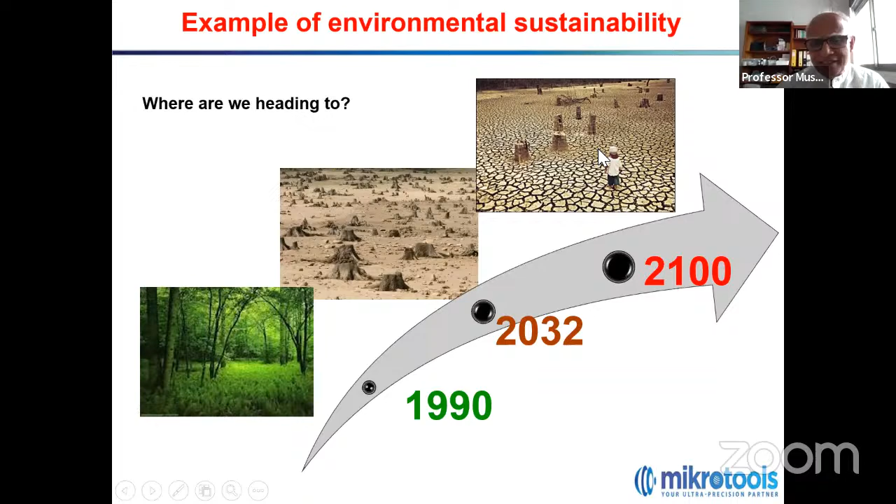We cannot afford to do that. We'll have to think sustainably. We need to remain sustainable. And so we'll have to continue with sustainable development. For that, we'll have to make a trend that what meets the needs of present today, it should, without any compromise, meet the needs of future as well, so that the whole universe remains green, evergreen, what it was, and it will be in the future as well.

Now, who will do it? As Einstein says, engineers create that which has never been, and others also said so. So it is our responsibility, the mechanical engineers, manufacturing engineers, to create things, innovate things, and make things much cheaper and easier, of course, higher and better quality.

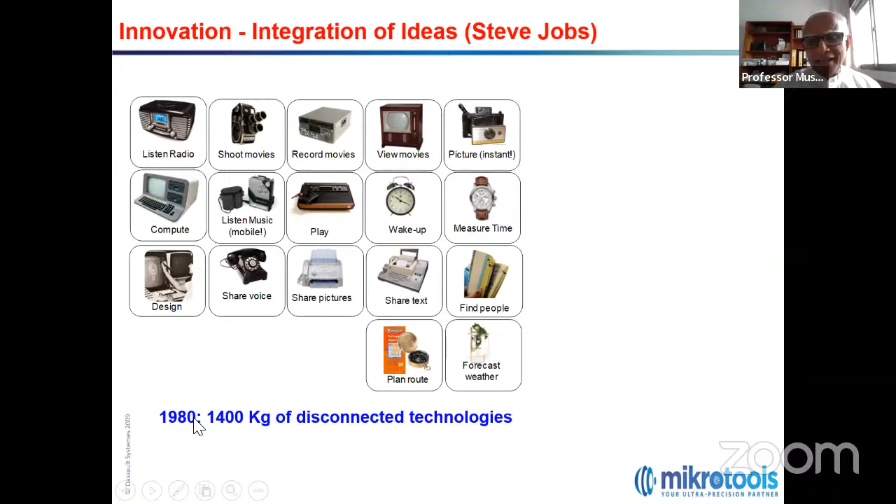Now, nothing to worry, actually, the trend has already started, as you see, knowingly or unknowingly. Steve Jobs did it in 2007. I hope you can guess who did it. All these gadgets, television, camera, whatnot, all communication and all utility devices, which was weighing 1,400 kg in 1980, just came to a smartphone, which is only 200 grams, done by Steve Jobs. So this is in his, he did it.

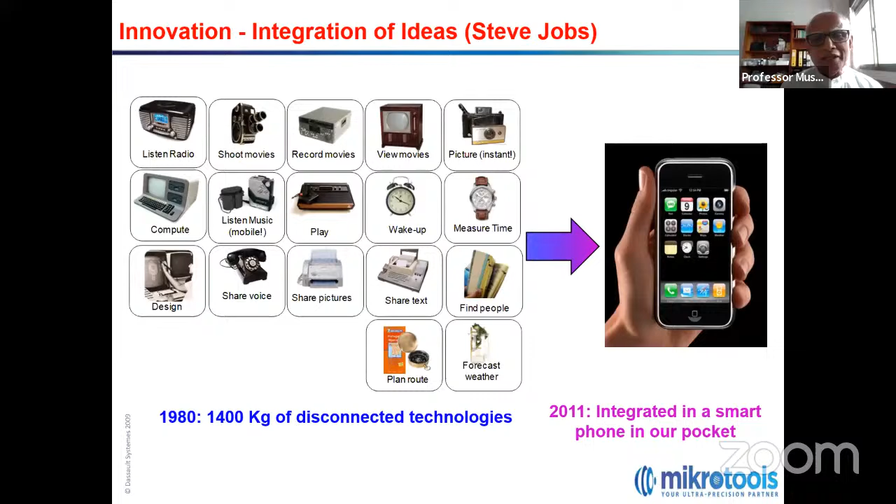And I'm happy to announce and show you that we also started the same trend, and we started in 1990s. We thought we'll make small products. We'll do micro machining to make micro products rather than using big machines. And we found that to make micro product, all these machines individually cannot do it. We'll have to have a machine which is much smaller and can do everything, which initially it was not accepted by people. And even the company where I was working, they said, no, ridiculous idea.

That I left the company in Japan and joined NUS in Singapore. And my first research proposal was to integrate all these machines into one machine for micro machining. And that time, roughly, all these machines were about 8 tons. Now we made a machine in 2003 and patented it, which weighs up to 1 ton. So a good thing is that it started.

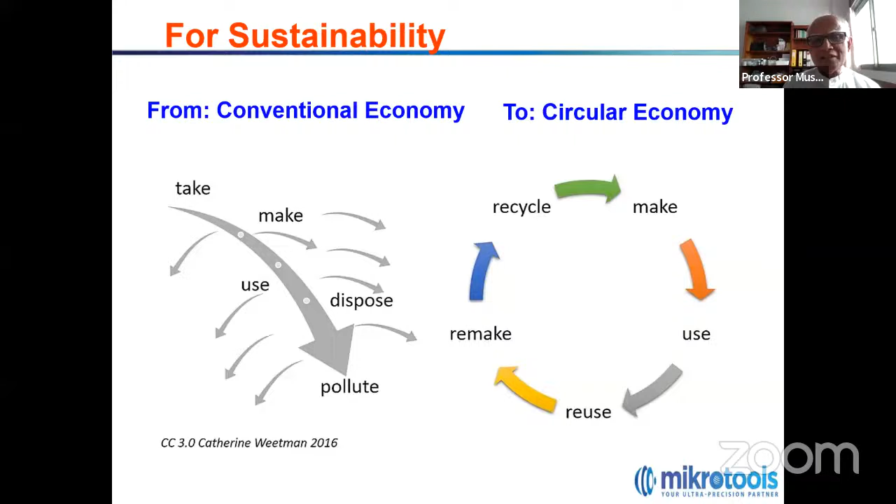And at the same time, if we look at for sustainability, what we need to do, we need to move from conventional economy to circular economy. That is the trend now. It started already. So what we do, we make a thing, we use it, dispose it, pollute, throw it and pollute it. But on the contrary, we will have to do something, make things, use them, reuse them, remake them and recycle them. Then all this energy saving will be upward. I want to move left, minimize the use. So that's why we'll have to be not only circular, spiral economy moving upward.

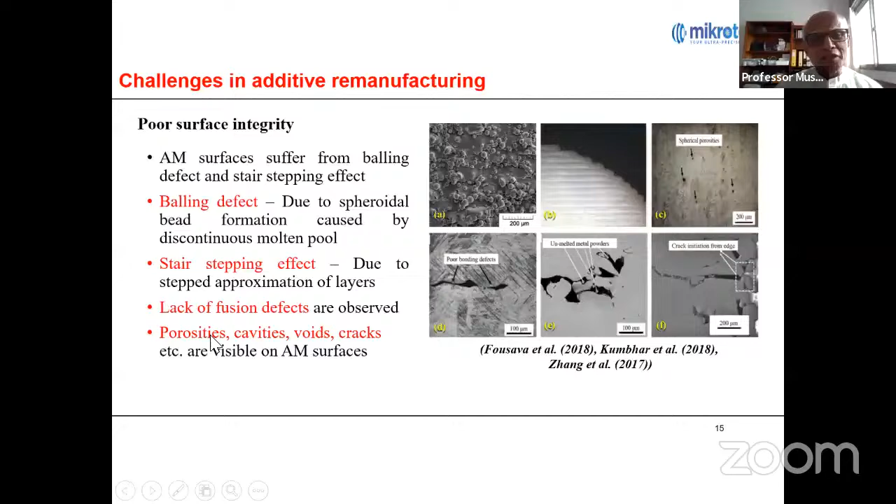And for that, they need to improve the surface finish, basically either do grinding or polishing. So the grinding is a very conventional way, and later the polishing is done by laser, then abrasive flow finishing, chemical polishing, and all these things are going on. So these processes are there, laser polishing, chemical polishing, abrasive flow machining, and machining polishing. I'm not going to go into those. It is there in the presentation. Now, what is the problem of this conventional machining things, conventional polishing things? Let me see, grinding and polishing to improve the surface finish.

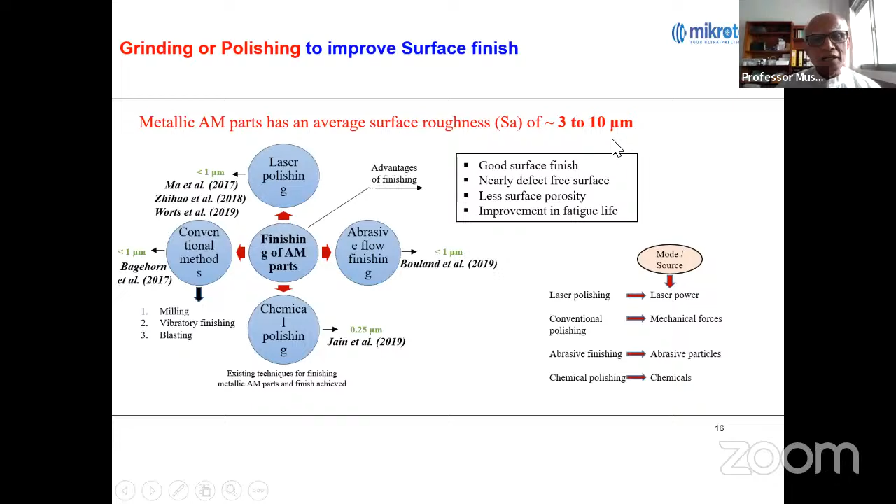One slide I missed. Usually after 3D printing, you get a surface finish of 3 to 10 microns, and by different processes they can reach up to 1 micron. But surface finish is somehow acceptable.

But the main problem is when you do grinding, there are cracks of different dimensions. It could be a macro crack, it could be a nano crack, but there are cracks. As long as there is a crack, the surface is not perfect, even if it's considered a high precision, ultra precision part.

So it cannot be used for high quality products, especially optics. Then comes polishing. The main problem of polishing is it's a non-deterministic process. If the surface profile is not correct, the reflectivity of the surface is not there. So for ultra precision parts and components, even polishing and grinding cannot be accepted. We will have to go for machining.

So then comes ultra precision machining. Now coming to advanced machining techniques in remanufacturing, let me talk about two areas: one is micro machining, another is nano machining. Let me start with micro machining.

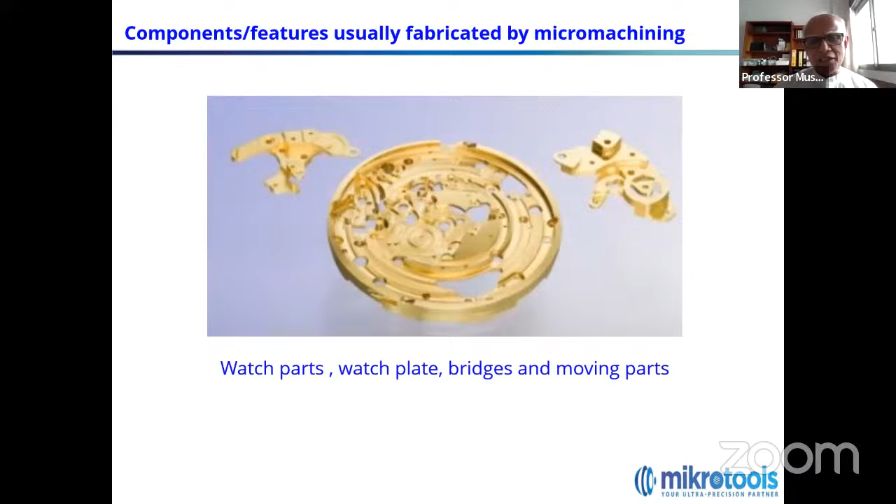Why is it so important? If we look at any fine components like watch parts, watch plate, bridges, and moving parts, all these parts are very high quality, very fine, with very small features. A few more examples like gas and liquid thermometry - very fine features, fine machining, quality of surface approaching nano.

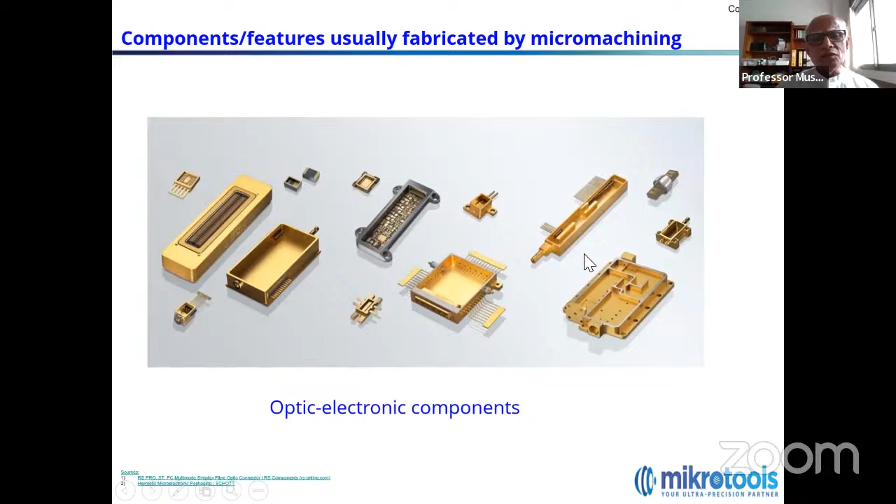And these are nano positioners, and these are all components of optic-electronic components. You see, so minor, but they must be very accurate. And we cannot allow them to be discarded - as Professor Dixit was saying the first day, if one component of the watch is damaged, we should not throw it away, we should repair it, redo it, and remanufacture it.

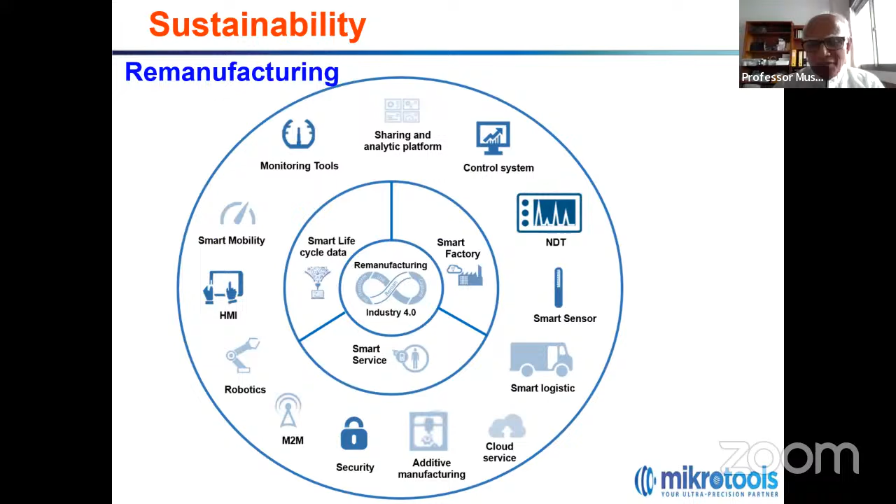Now, talking about micro machining, how are you going to apply it in remanufacturing? Taking this picture, we'll have to manufacture, which is basically composed of so many micro components or components with micro features. Additive manufacturing should be there, as I mentioned, but we developed a machine especially for micro machining.

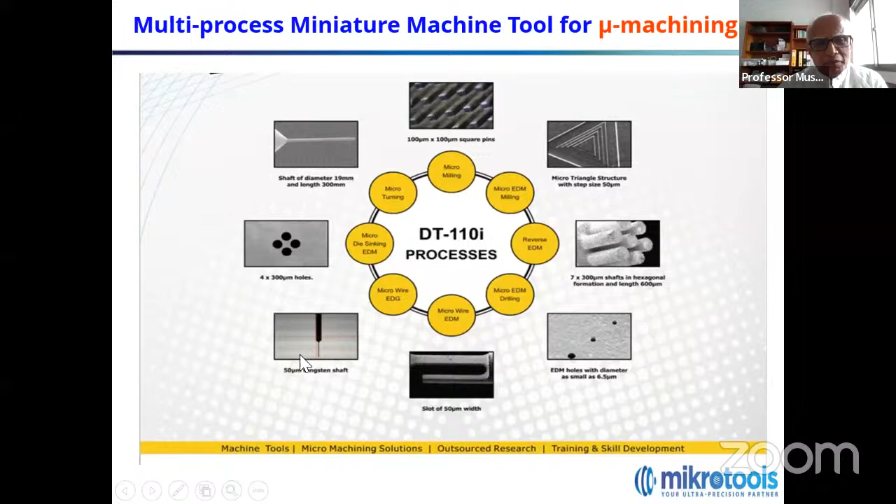Our objective was one machine should do everything - conventional machining, non-conventional machining, all at micro level. As you see, we developed this machine - it does micro milling, micro EDM milling, reverse EDM, micro EDM, on-machine measurement and micro turning, all these features, name it, it can do it. I'll elaborate further. Let me go to the problem of the machine.

We thought of developing it. We thought we will do micro machining. First of all, we need extremely high quality precision, motion accuracy, fine position control. These things were not there. Processes, I will explain later.

No successful micro machining can be done without hybrid machining. Really high quality products need a hybrid machining process, and we need to develop these processes - these are not just scaling down conventional machining. Most importantly, the machine will have to have metrology on it. Otherwise, you cannot take out the part, measure it, and bring it back. Considering all these things, we had to develop a machine.

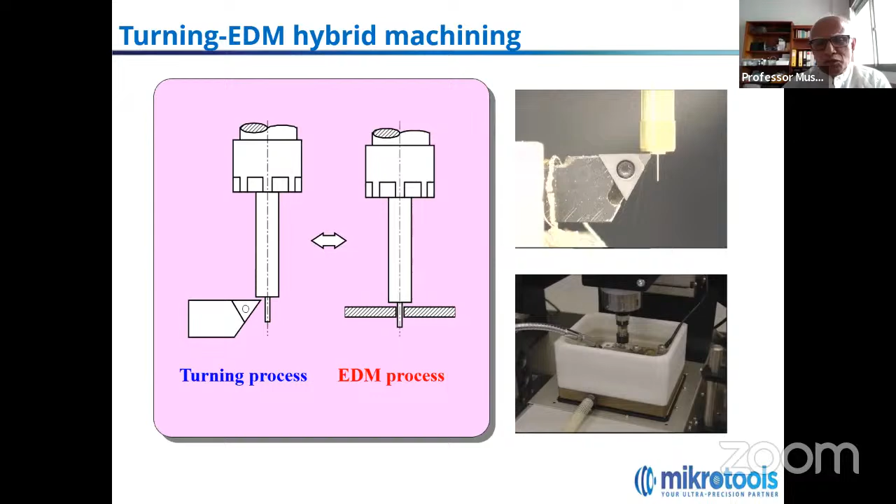Just to give a quick example of how micro hybrid machining is necessary: if we try to make a hole which is only 50 microns, we machine an electrode of 50 microns, then take it to another machine, an EDM machine, to do it - it cannot be done. So we'll have to think of machining the electrode here and bringing the EDM tank below, then do it. Otherwise, buying an electrode from the market, there will be clamping error, so your target accuracy will not be there - the hole will be much more than 50 microns. So hybrid machining is necessary. All the details are later.

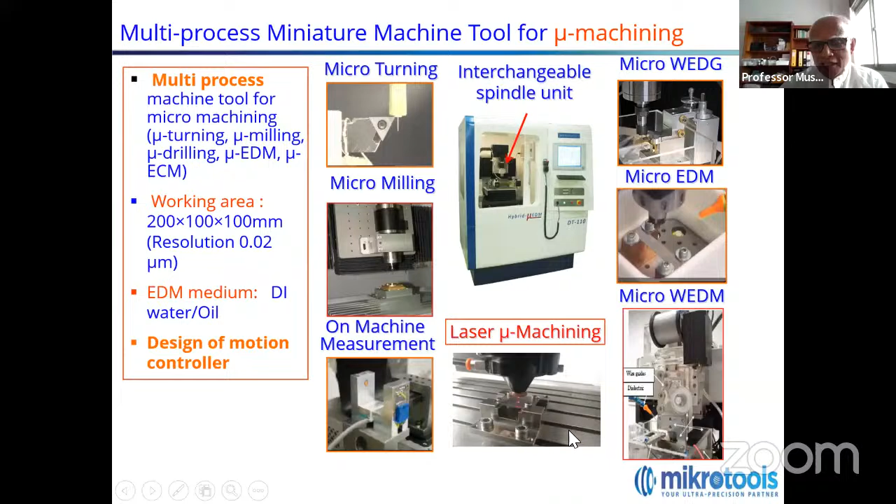So we developed a machine in 2003 which can do micro turning, micro milling, on-machine measurement, micro wire EDM, micro EDM, micro grinding, and with on-machine measurement we have added laser as well. So the machine is ready now to do all sorts of machining in one setup. That way, one big step has already been made.

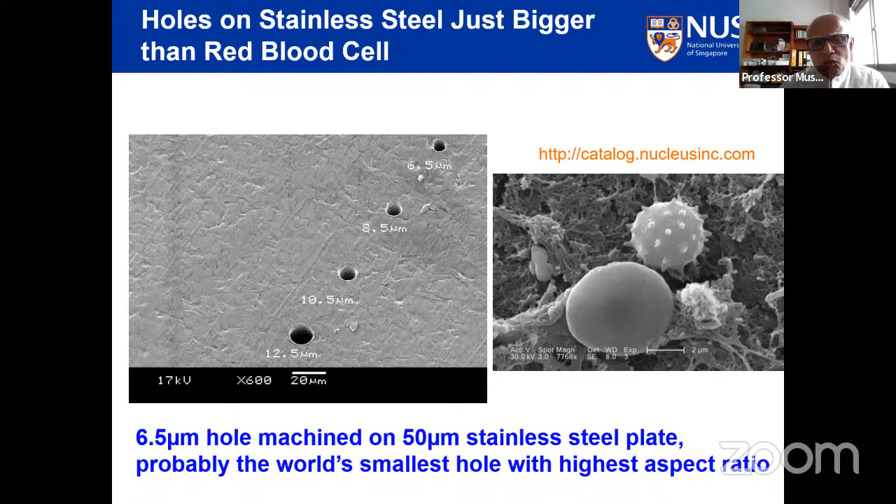This is one of the features - after machining by turning, we do EDM, sacrificial EDM. We reduce the diameter and scan it at every stage, and finally we machine the hole by EDM, and the hole is about 6.5 microns. But just conventional machining, without hybrid thinking, making a 6.5 micron hole is almost impossible. It's still holding the record as the smallest hole with the highest aspect ratio.

While developing the machine, our objective was to do hybrid machining. We tried to hybridize many machines - even EDM and ECM were brought together to do hybrid machining, and this has been presented in talks in many places. I will not go into details of it. This is an EDM surface.

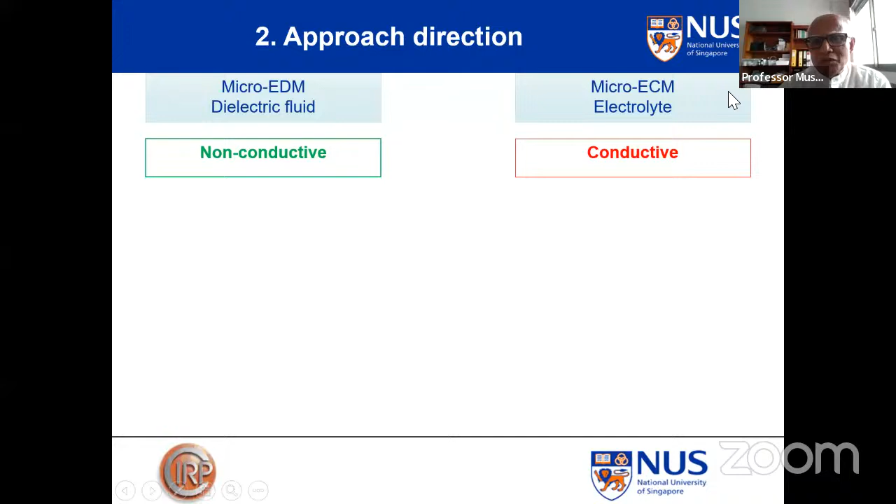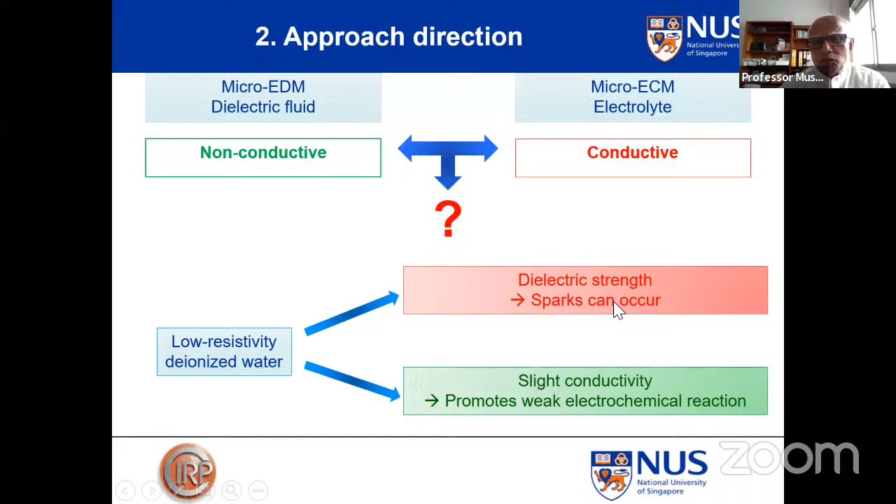After ECM, you get it, but if you do it in two machines, accuracy problems arise. So we tried to do it in one machine. But the question was how, since EDM is done in non-conductive media and ECM is done in conductive media. We did it using low resistivity deionized water, where dielectric strength is good enough for sparking and conductivity is good enough for ECM.

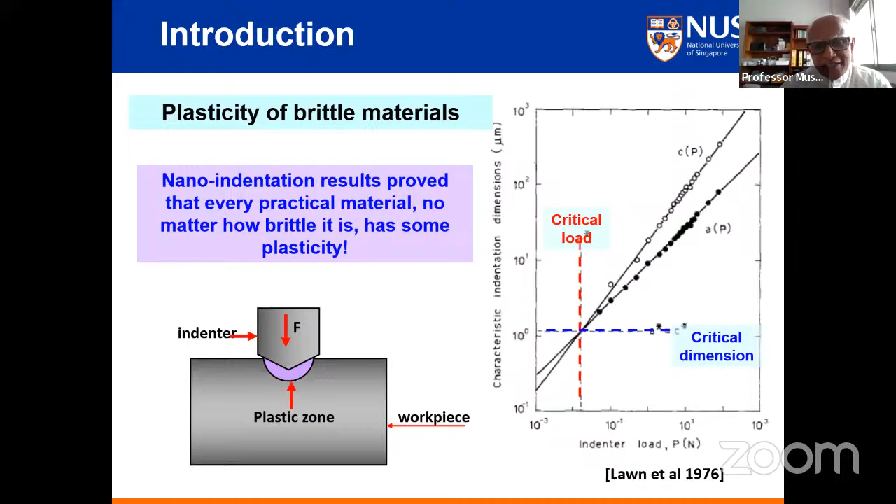So this machine does a lot of things. Because of this machine, we even dared to do ductile mode machining of brittle material. We tried silicon, where a nano indentation test proved that after depressing the indenter more than one micron, it cracks. Using that 1 micron as critical chip thickness, we carried out up milling. As chip thickness approaches 1 micron, it cracks, so we subdivided this micron into hundreds and thousands of divisions. Because the machine is absolutely accurate, we've been able to achieve ductile mode machining of brittle material.

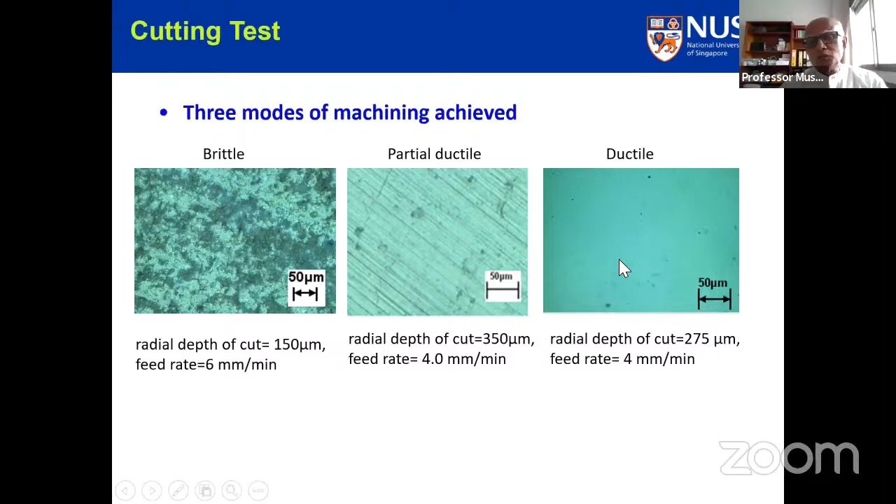This is the brittle surface when feed rate is very large, at 6 millimeters per minute. When feed rate is reduced to 4 millimeters per minute, the surface becomes partially ductile. When feed rate remains 4 but we reduce the radial depth of cut, we get perfect ductile mode machining. So by playing with these cutting parameters, this machine can achieve ductile mode machining of brittle material.

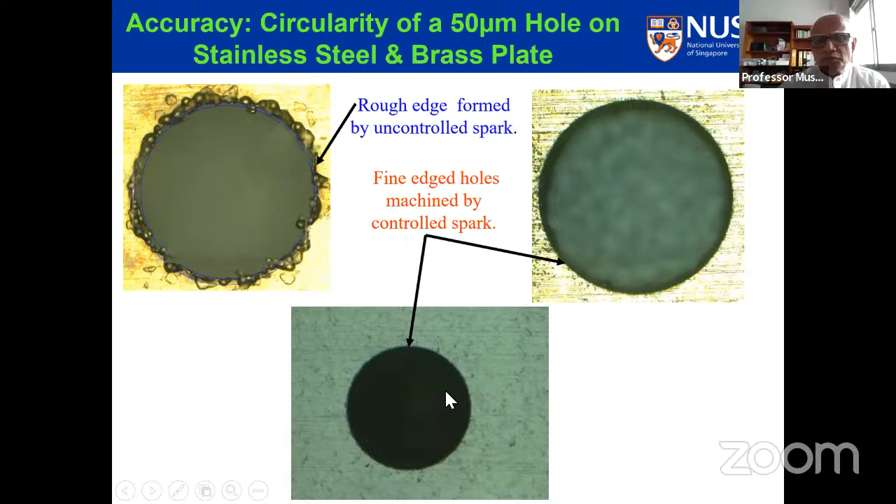The machine is absolutely accurate. Conventional EDM produces this type of hole, but with our machine, we get almost a jig boring hole. To summarize, this machine combines all conventional micro machining—micro turning, micro milling, micro drilling—and non-conventional techniques like micro EDM, micro ECM, laser, etc. It has an on-machine measuring device and can do simultaneous EDM, ECM, and laser. The record holding hole is 6.5 microns with a 10 times aspect ratio.

So this machine is really very applicable for remanufacturing. The only thing is we'll have to add more aspects—we have laser, but we'll need to bring in additive manufacturing. Now let me come to this hybrid and nano ultra precision machining, which we initially targeted only to generate high quality optics and ultra precision objects. But now I think we'll have to upgrade it to do remanufacturing. So why is advanced machining technique necessary in remanufacturing?

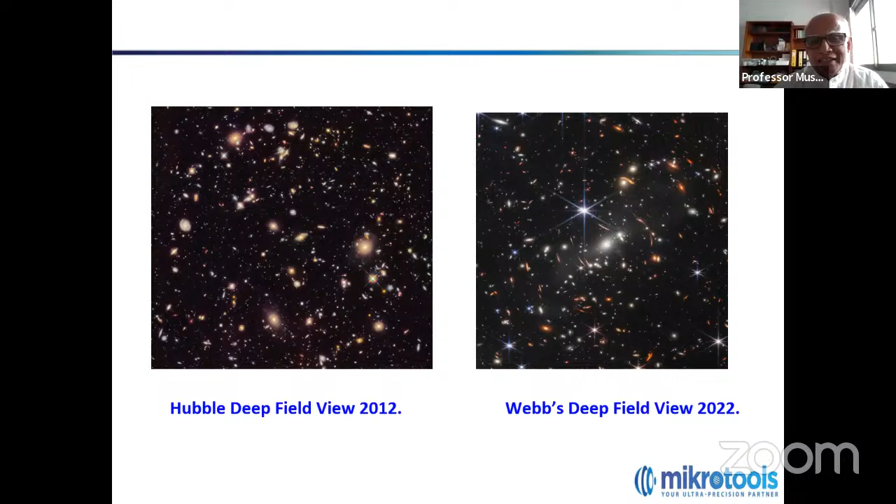That way, even our inspections and measurements in the human body would be much better. I spoke to one cardiologist here. I asked, how accurate are you when you detect blocked arteries? They said most of us go by assumption. So all these assumption-based things have to be removed. The optics quality of all sensors, all optics components, should be so good that everything can be seen accurately. And that is only possible if the machining quality is improved.

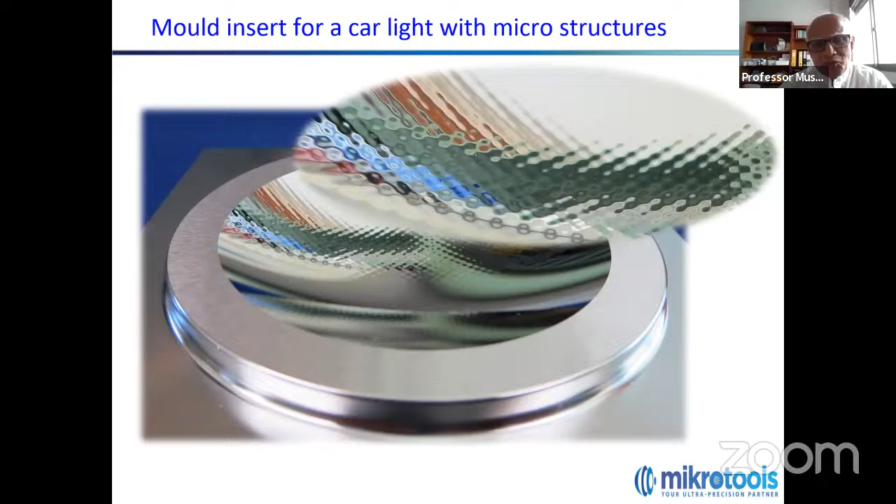Just as an example, this is the object—a car light. If you look at the mold for it, the machining is so complicated, so delicate, so fine, so accurate. If this type of mold, after being used hundreds or thousands of times, wears off, should we throw it away and make a new one? No, we cannot do that—these molds are very expensive and complicated, high quality, high precision, requiring a long period of machining time. We cannot afford to throw them away. So instead of refabricating a new one, we will have to remanufacture—do the modifications and corrections wherever necessary using additive manufacturing, and then remachine it.

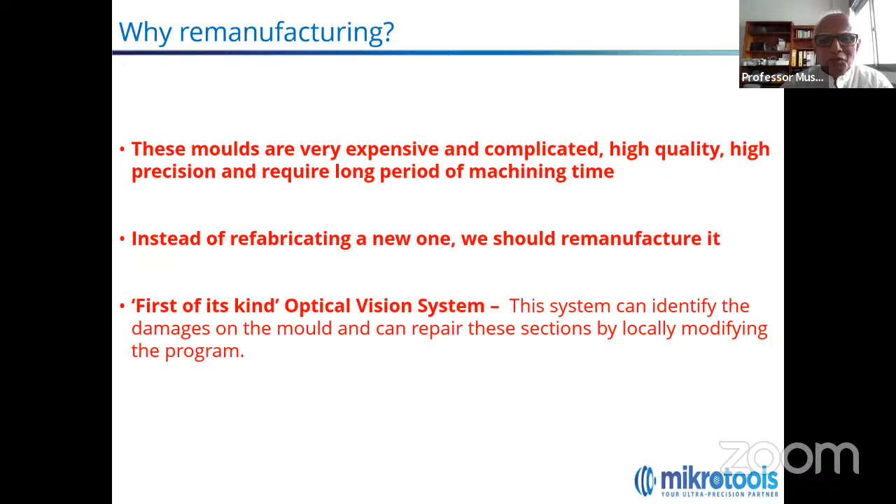Only a little bit of remachining can save the whole thing. For that, our machine is ready because we have developed the first of its kind optical vision system. This system can identify any defects or damage anywhere, and can quantify the amount of repair necessary. So this machine is quite appropriate. With some more changes, improvements, and additions, it will be absolutely useful for remanufacture of ultra-precision components.

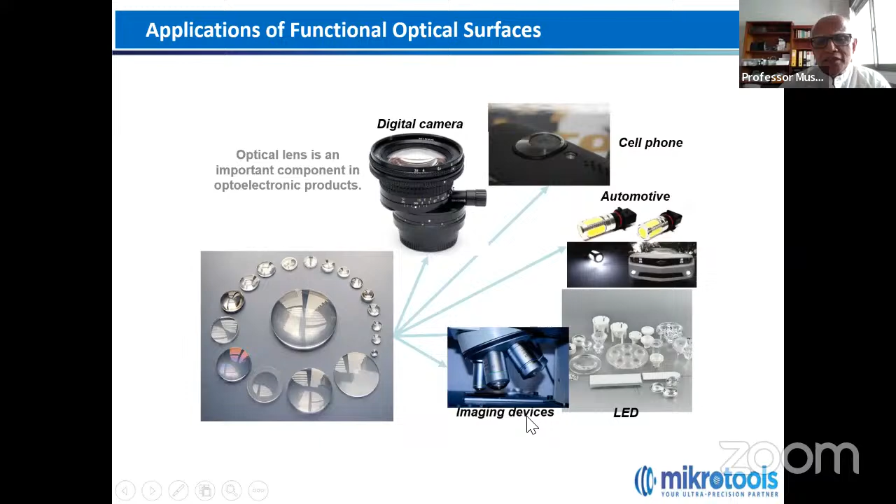And challenges are there. We started solving them, and this technology is used everywhere, as you see here - in digital cameras, cell phones, automotive, imaging devices, and LEDs. In electronics, smartphone cameras, motion sensors, and virtual reality headsets for digital twin manufacturing, everywhere, and the lenses for that. So everywhere it is coming, and it is coming at a bigger and bigger scale.

Just to give an example, Hyundai has developed a lighting system for cars which can predict whether there is no vehicle directly ahead, or whether several vehicles are ahead. So you see, everywhere this optics and ultra-precision machining is coming at a bigger and bigger scale. Hyundai has already started using this.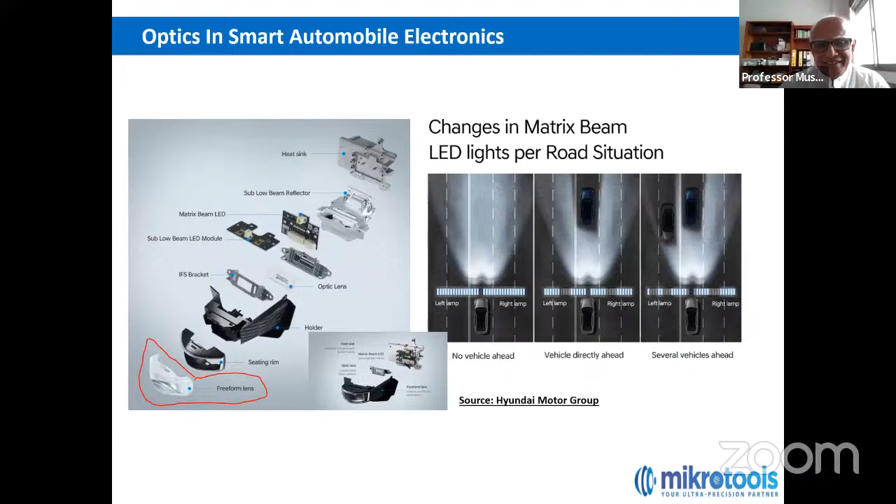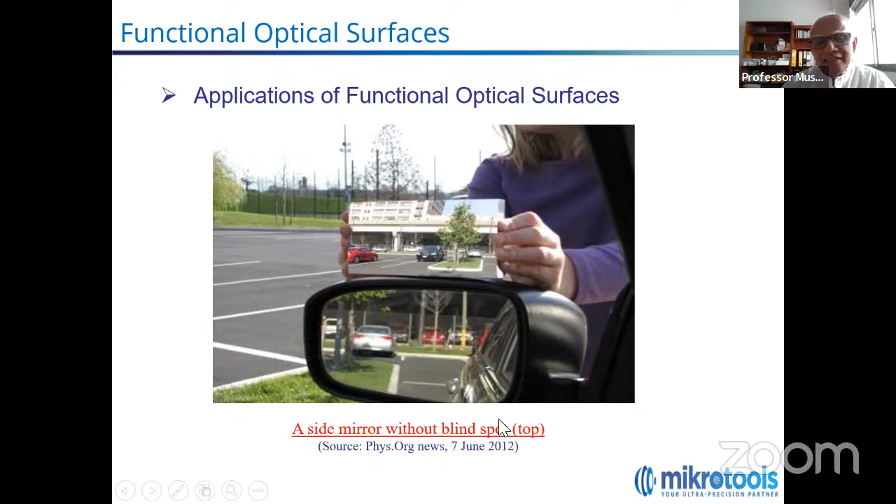And if you look, every driver is complaining about blind spots causing accidents. But if you have a very high aspect ratio concentrator mirror, then you can avoid this blind spot, and it has already been developed - a side mirror without blind spot. So things are changing, and changing quite fast, all for the good use of human beings.

To achieve all these things, you'll have to generate free-form surfaces in optics through compound diamond turning. Compound means that on top of one-axis machining, you'll have to have a fast tool servo to generate features on a plane surface, and you'll have to couple it with a slow slide servo. This fast tool servo and slow slide servo combination can make miracles. I'm not going to discuss the details.

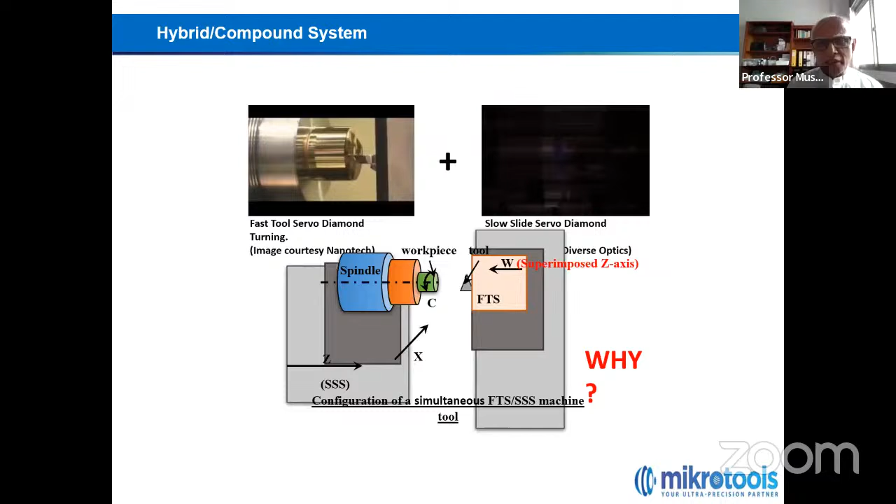As you see in the video here, the fast tool servo tool tip is moving against the C-axis at a very high frequency, ultrasonic frequency. When the stroke length of the fast tool servo gets exhausted, then the slow tool - meaning the slide - moves to machine deeper features. This is the combination of these two, and by that you can machine surfaces like this compound eye surface.

And when it comes to remanufacturing, taking all these peripherals into account, we attempted to address all these necessities. We tried to develop a machine which is really state-of-the-art, first of its kind diamond turning machine - this ultra-precision CNC diamond turning lathe, which produces optical mirrors, lenses, multi-lenses, mold inserts, and free-form surfaces.

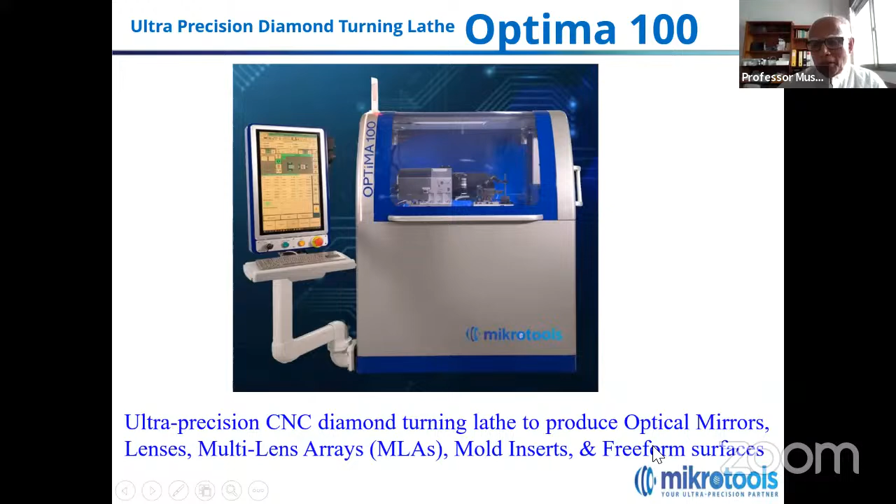Now, another reason for doing that - if you look at this Taniguchi prediction, Taniguchi being a famous Japanese scientist who predicted how accuracy level and surface finish level would move forward. In 2020, he predicted 1 nano surface finish should be achievable. Unfortunately, we are yet to reach 1 nano, even though we have crossed 2020. So I think our technology is not up to the expectation. We attempted to develop a machine which can at least machine 1 nano surface finish, and we hope the machine we have developed can achieve less than 1 nano surface finish.

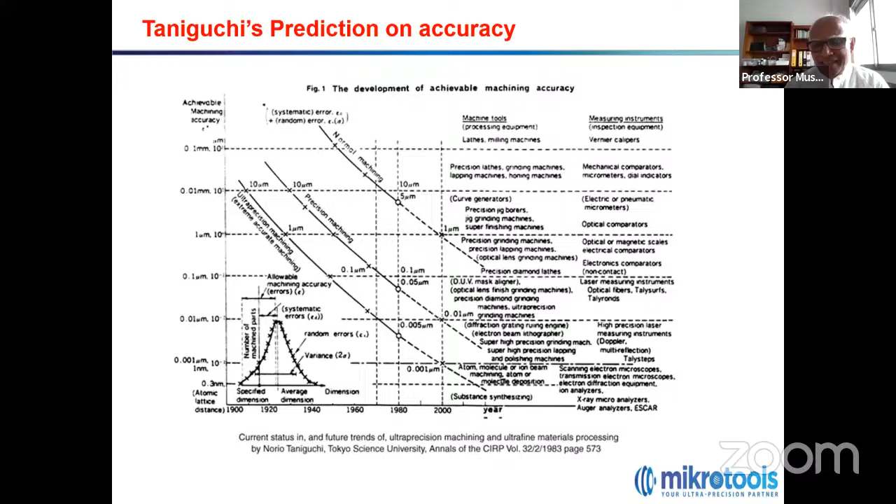Let me explain quickly how. First, we had to develop the theory. Usually people are doing diamond turning without knowing the theory of why and how it happens. We attempted this in 2010, doing one project, and people think the tool edge is infinitely sharp, which is not true. We found there is a roundness, and we thought that roundness is causing the problem - edge roundness of the tool is R, and we take the chip thickness as A.

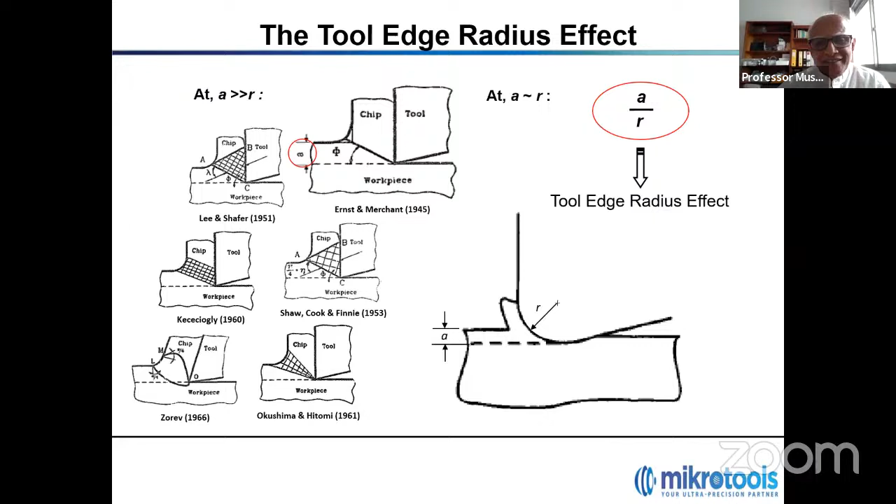I will cut short the discussion - this A by R, chip thickness with edge radius, A by R causes this problem. And after analyzing, we found that when A by R is greater than 0.25, then concentrated shearing takes place.

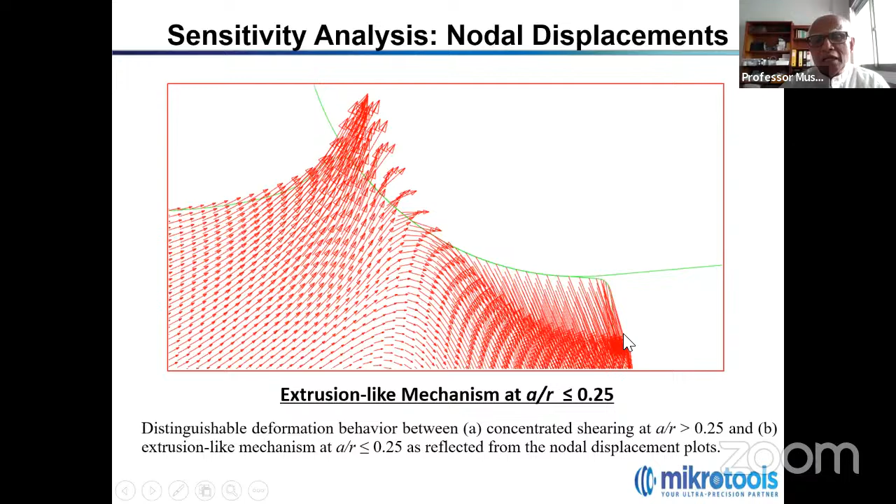Everybody, all of us, we know shearing and plowing. In between, what is happening, we try to investigate that. And we found that when A by R is less than 0.25, reverse flow of the material takes place, which resembles extrusion. Thereby, we developed this theory of extrusion-like mechanism, where reverse flow of the material takes place. This is concentrated shearing, where A by R is large, and here A by R is very small, below 0.25. So the first breakthrough came, and it was done in 2010.

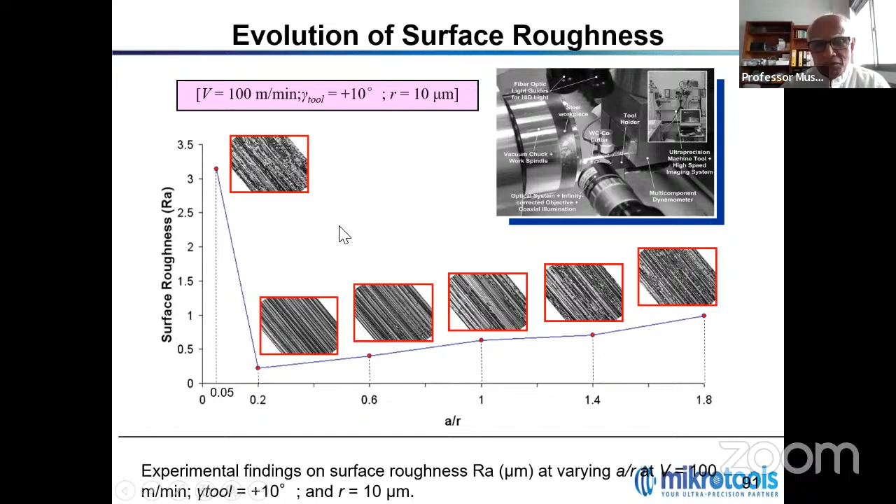At A by R 0.2, we get an absolutely very clean surface. Beyond that, surface becomes rough. Below that, surface also becomes rough. These are all details, but again, we continued.

What happens? Can we go beyond that? I'll make it very short and quick. We found in another study that when A by R is 0.05, we get even much better surface. So all these theoretical analyses, substantiated by experiment, give us confidence that definitely the time has come. We should get ready with a machine to achieve surface finish less than 1 nanometer.

So the machine comes with special features like an 8 picometer linear optical encoder with a glass scale. I am happy to say this is the first scale in the world with such a high resolution of 8 picometers.

And our in-house CAM, we don't buy a CAM system, we develop our own CAM system with a graphic user interface, very user-friendly. It can do aspheric, micro-lens arrays, Fresnel lenses, free-form surfaces using fast and slow tool servo.

Most importantly, it is the first of its kind optical vision system, which can take all measurements - tool length, tool height, tool nose, edge radius, workpiece diameter - everything below 1 micron. Again, the whole complete software is supported by our own graphic user interface.

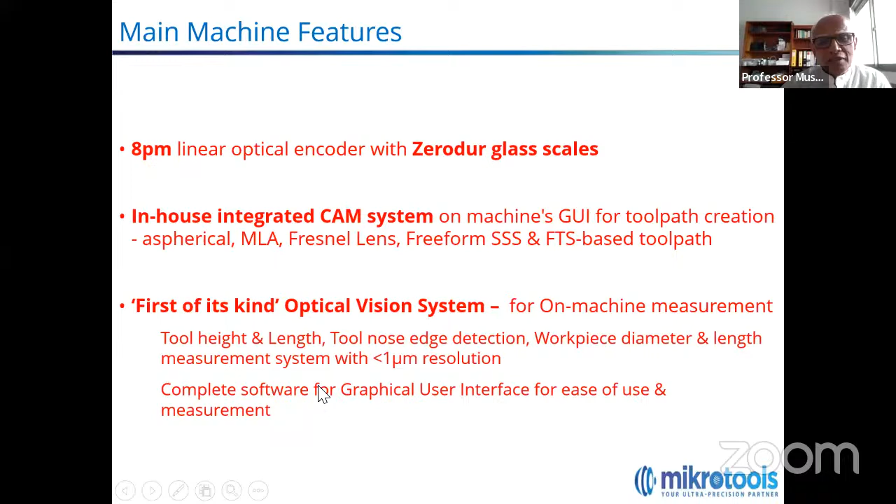This is a vision system. From the top, it can measure the tool edge. When you bring it to the side, it can measure the cutting edge from another direction. So it's a 2-directional measurement. That way we can measure the workpiece dimensions as well.

This machine comes with slow slide servo and fast tool servo. Most importantly, another device we have incorporated here is an ultrasonic elliptical vibration device. That's very wonderful - others are yet to add it.

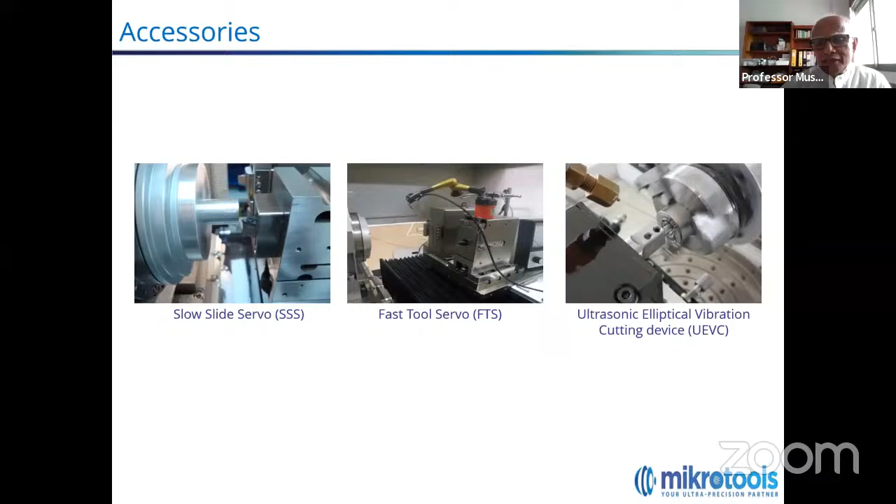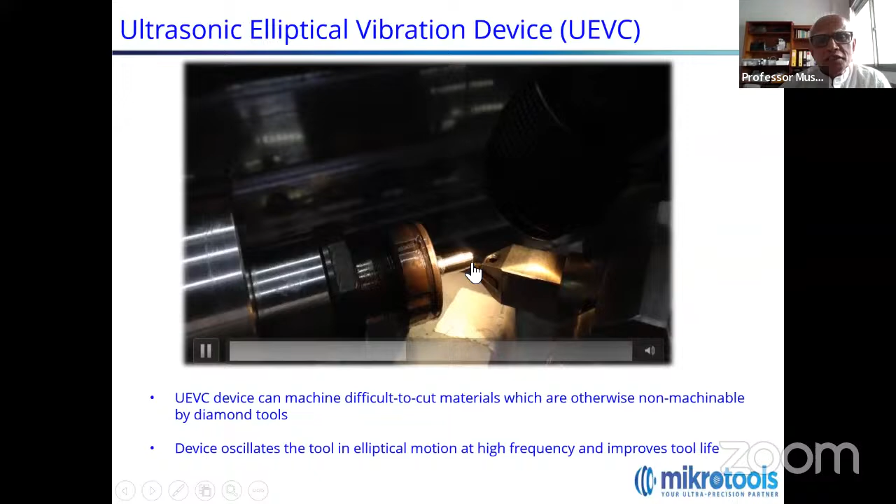Slow tool, fast tool, I will skip quickly, and go to the elliptical vibration device - please listen carefully. Because of this device, you see it in operation here. The work is here and the tool is cutting. It's very difficult to see how it moves in the elliptical path. I'll quickly take it to the next part.

This is how the tool usually works in ultrasonic cutting. The tool is in touch with the workpiece and it vibrates continuously with small amplitude - fast tool servo - and cuts. But here, that way the tool life is short, and once the tool is damaged, the surface becomes damaged.

Here, the elliptical vibration tool moves in an elliptical path, though it looks circular - its A and B axes can be changed. It has a mechanism that lets you change the shape of the ellipse. This is the thing, more details.

Conventional cutting has only one directional vibration, while in elliptical cutting, the tool rotates in this path. As you see here, more elaborately, as the tool comes in, cuts, and moves away, it moves in an elliptical path, changing the A axis and B axis. Depending on the material, you can decide and determine which axis will be longer or shorter. That way, your cutting force is minimized, surface finish is better, and tool life is much better.

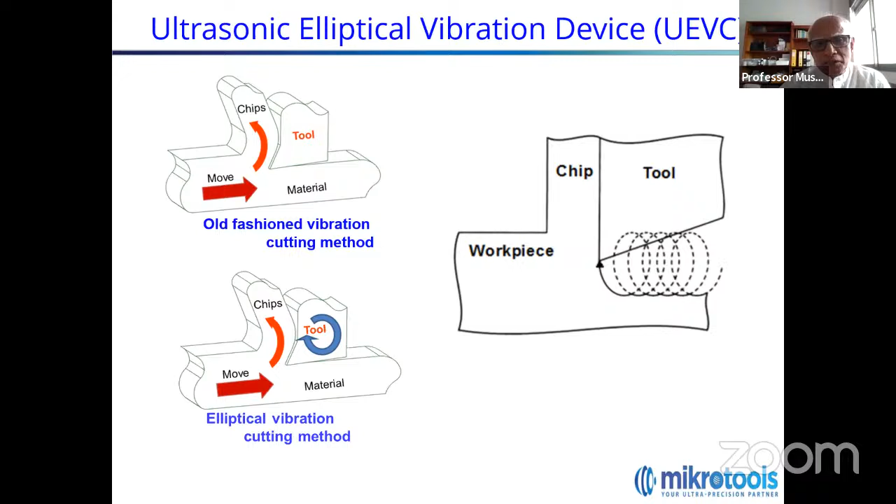As I mentioned earlier, using up-milling, you can really generate a ductile mode surface - you can do ductile mode machining. In this elliptical vibration device, exactly the same up-milling principle is used, and I'm sure it is now very clear how this elliptical vibration device can cut brittle material. So using this device, you can cut any material you want, whether ductile or brittle, ceramic or silicon, steel or aluminum.

So this is the principle again - in conventional cutting, the cutter moves in one direction. In elliptical vibration cutting, it cuts in an elliptical path, in two-dimensional cutting. This is the device.

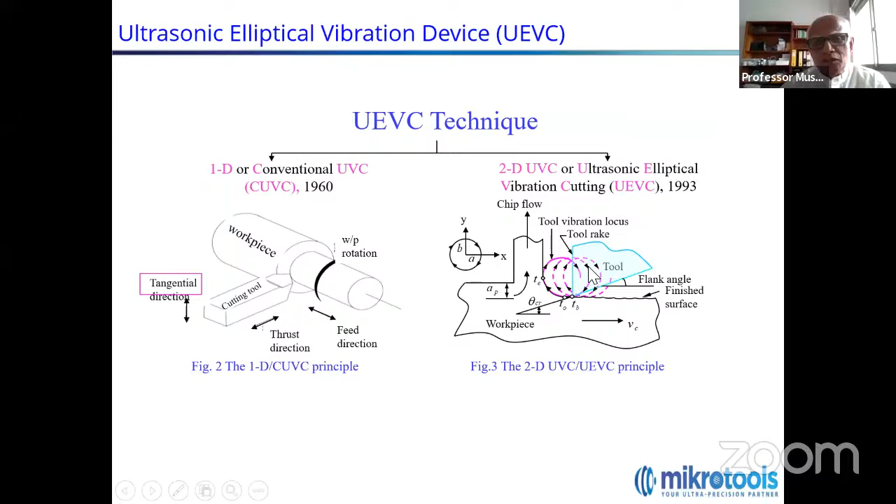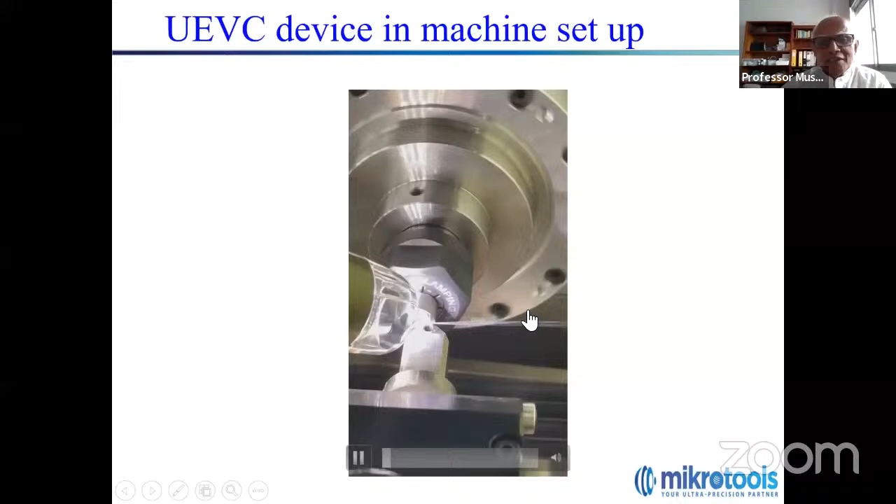If you look at this video, you see the chips flowing as if powder is flying away from the machine. The chips are so fine.

And then if you skip, this is another example of machining being done. We have machined tungsten, and as you see, we have machined tungsten. Others are saying that tungsten is difficult to machine, but we have done it very easily.

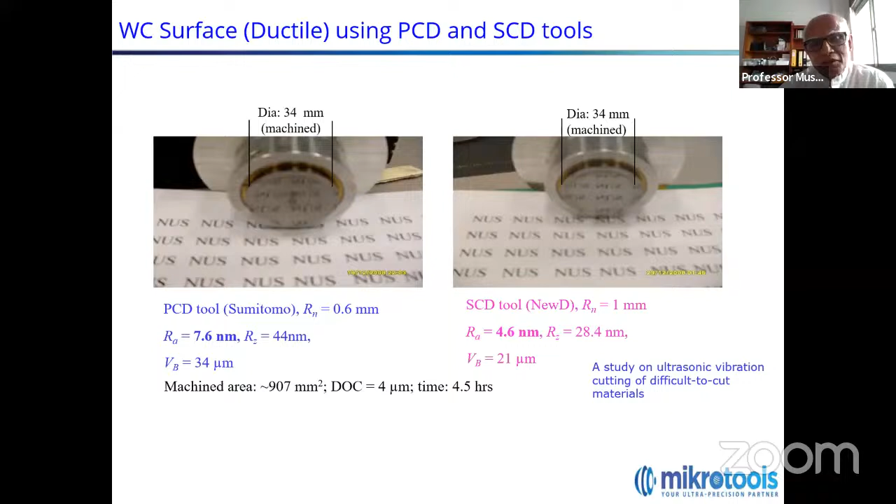Easily we have machined using PCD, polycrystalline diamond, and single crystal diamond. If you use polycrystalline diamond, surface finish is about 7.6. If you use single crystal diamond, you can get a surface finish of 4.6, though it is brittle material. But slowly we hope to improve the surface, and again for even brittle material, we are targeting 1 nano.

These are some more examples, and you see the machining reflection is so clear, surface, you can see fine lines. This is machining of tungsten. Now coming to what are the cases it can do.

We even got surface finish of 2 nano. These are all nickel plated die, it's 4 nano, and you can see the reflection quality.

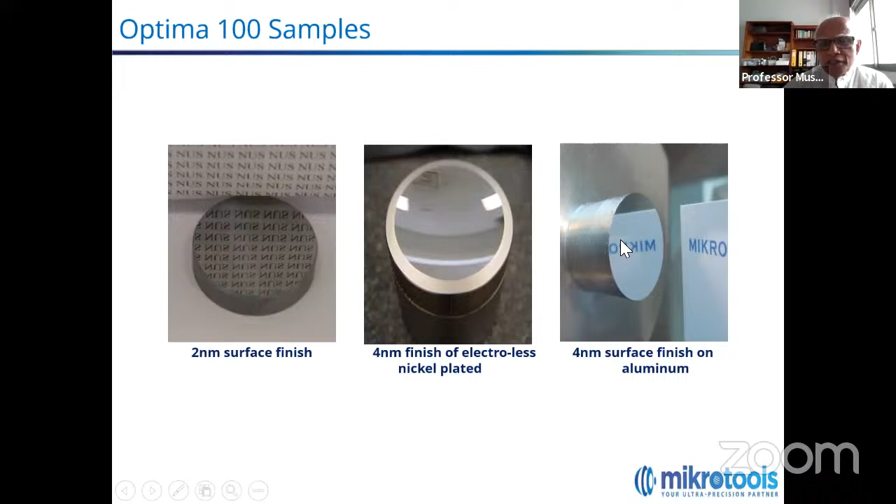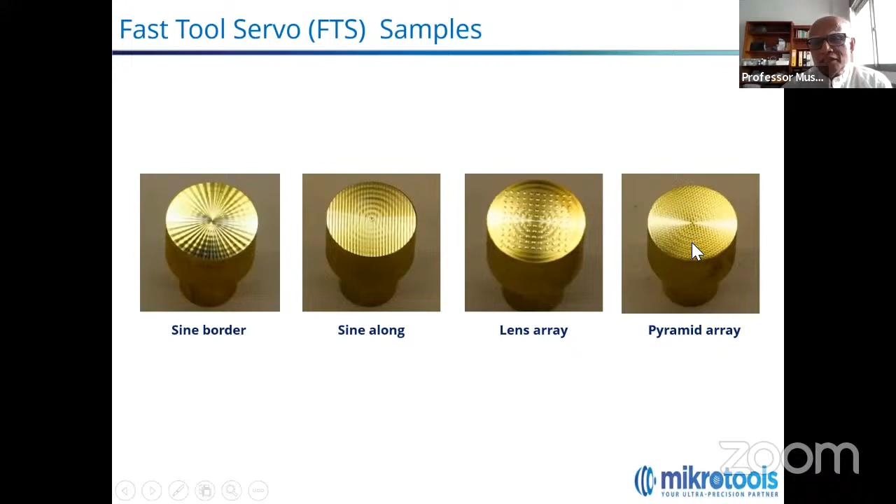Using slow tool servo, we can generate features like this, and sinusoidal surfaces. Using fast tool servo, you can generate surfaces, as you see here, hundreds of pyramids are machined on the surface. And again, combining slow tool servo and fast tool servo, you can do all sorts of hexagonal lenses, multiple compound eyes, and so on. So I would like to finish here.

Thank you so much for listening.

Mostly I'll be concentrating on the design aspects in remanufacturing, how you should design the product. That is one issue, and maybe some more points, because there are lots of participants, and many may not be very familiar with remanufacturing. Although remanufacturing is not a very new technique, people have been doing it in some way, but as a mass movement it is somewhat new, because how it will be done as a mass movement, how it will be identified as an industrial activity. We have been doing such things—suppose there is one machine and we renovated it, put something in—but that is only at the level of one or two machines. Now we have to discuss how it can be taken as a mass movement so that it can help our economy and be useful. So what capability we have already got, all these things we will discuss in about half an hour.

So what is remanufacturing? It is the process of returning a used product to like-new condition. There are many definitions of remanufacturing, but one is that it is the process of returning a used product to like-new condition. It results in cost saving in the range of 20 to 80%, and quality can be made as good as a new product. In fact, the warranty is also given like a new product.

There are some more people who have also defined remanufacturing. One definition is the process of bringing an already used product to a new condition through replacing and rebuilding component parts. Usable parts are cleaned, refurbished, and put into inventory. Then the new product is reassembled from both old and new parts wherever necessary.

This definition tells us the process also involves getting the old component and inspecting it. There is a lot of scope here for non-destructive testing and analysis to predict the usable life of the items and similar aspects.

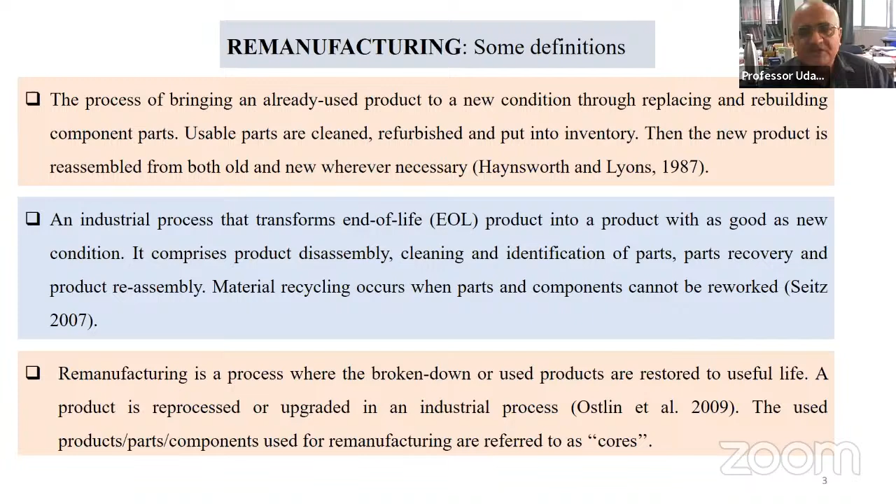Before discussing that, let us discuss some of the advantages of remanufacturing. One is sustainability - it costs less to make and buy a remanufactured product than an equivalent manufactured product, and it also implies a skilled workforce. So two advantages you are getting.

So one goal is economic and one is environmental, because cost will be less, so you will be saving money. And the environmental benefit will also be there because it takes less energy - so less energy consumption will be there. And there is a social side benefit too, because sustainability means economic, environmental, and social aspects.

On the social side, remanufacturing implies a large amount of skilled workforce, which will be utilized. It also saves the energy needed to manufacture a new product, conserves natural resources, and reduces landfill disposal compared to manufacturing a new product.

Many times what happens, like in tire industries, huge tires are cut into pieces, shredded, and used as landfill. They are used in road construction also. But such activities, in the long run, may pose a lot of danger to the environment. So it is better that they should be reused.

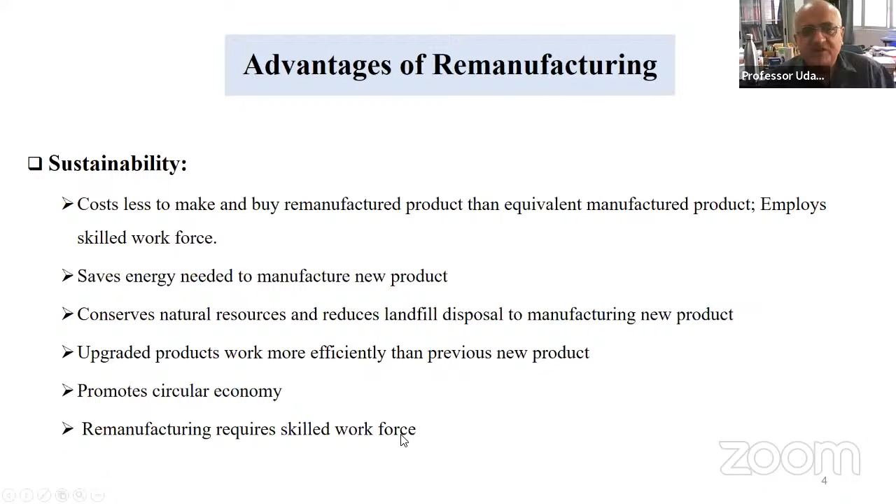Upgraded products work more efficiently than the previous new product, because you employ some latest technology, so they may work more efficiently, and it promotes circular economy. Naturally, nothing is wasted, so it promotes circular economy, and remanufacturing requires skilled workforce - which is also a good point, because you can train a number of people to come into the job of remanufacturing.

Then, in terms of performance, a remanufactured product works as well as or better than the previous product. This should be remembered - the product should be working much better than the previous one.

And responsibility - companies are increasingly being held accountable by stakeholders for environmental impacts from their supply chains and products during their life cycle. So this aspect is important: who should take up remanufacturing, the original equipment manufacturer or other industries? It is better that the original equipment manufacturer comes into the business of remanufacturing, so quality can be ascertained, and that company can also develop ancillary units which can help in the task.

So now, what are the steps in remanufacturing? First we have got the component, then we have to do sorting, inspection, then disassembly of the components, then cleaning and reprocessing, and then after that reassembly.

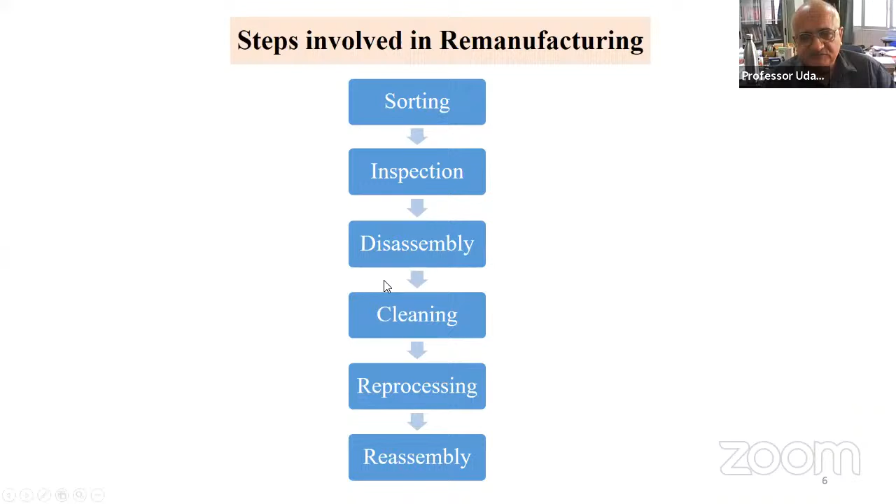So this type of process is followed, but after disassembly also you will get components, and again there will be some inspection, but more or less this is the process. Remanufacturing includes the replacement and repair of some parts. Some parts may have to be replaced and some may be repaired.

Now, because remanufacturing you may not do in large quantity, naturally if an original equipment manufacturer is making some product, let's say automobiles, and there is a production of say 10,000 new cars, the remanufactured cars will be less in number, maybe about 1,000, maybe 10%, 20%, or 30%. So there's a problem that you do not have mass production in all cases. That's why 3D printing becomes very important, because if some component is not there and you have difficulty, it may not be in your inventory stock, then it can be remanufactured by 3D printing. So the role of 3D printing will be very vital.

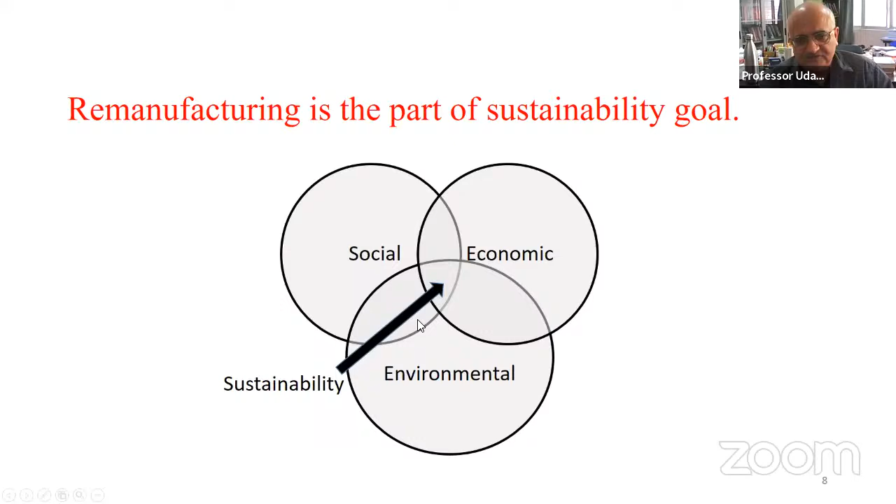Now, remanufacturing is naturally part of the sustainability goal. Sustainability means it has to be environmental sustainability, economic sustainability, and social sustainability. Now, in the present era of sustainability,

remanufacturing has a lot of significance. One is the economic side, it lowers cost and increases profit. On the environmental side, it does resource conservation, less energy and less pollution, then better health for people and the planet. And on the social side, it has a lot of scope to provide employment to people and particularly create skills for the job.

So in sustainability, the cultural pillar is also there. Even on the cultural side, remanufacturing may help, because old things can be preserved. We are fascinated to preserve the old, like vintage cars and such things. We want to preserve our heritage, so that heritage can actually be preserved. Many good products come from the grandfather's time, and you don't want to throw them. Suppose there is a chair in your house, even that chair, if it can be remanufactured, it will always be better. So remanufacturing can be applied in each area.

Today we are discussing this in the context of industrial products, particularly mechanical ones, but remanufacturing is equally applicable even for buildings. Nowadays, many buildings are also being made, and they can also be remanufactured, provided we design in such a way. For example, houses can be made by 3D printing. So those houses, after some time, can naturally be remanufactured. Recently IIT Madras also made some rooms using 3D printing, and Germany also made some houses.

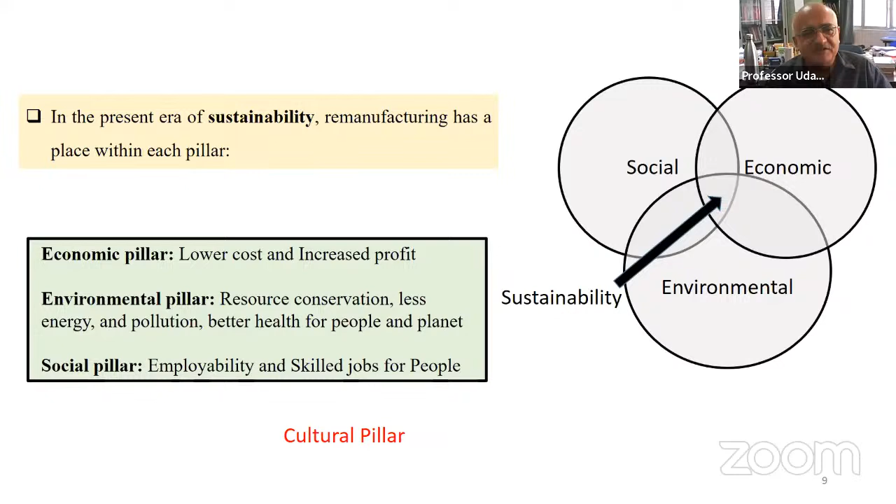So the present days, many things will be made by 3D printing, and naturally there will be scope for remanufacturing. So remanufacturing is not limited only to mechanical things, but applies in many places. Even temples can be constructed again, so our culture can be preserved, and the temple can retain the same type of architecture for years. So remanufacturing is usually carried out by the original equipment manufacturer, but OEM can outsource it. This way, many industries can be created, and naturally it has huge scope for employment generation.

Now, the role of reverse supply chain in remanufacturing, that is, how it will be achieved, is very important. Companies can give buyback offers, like old PCs can be purchased back, even old cars can be taken back by companies. This type of thing naturally governments also have to enforce. Remanufacturing can be fully successful only if the government also takes complete interest in it, because many times you have to tell the manufacturer that they should think about the life cycle of the product and how it will be remanufactured.

Otherwise, many times we used to have this system, like the Coca-Cola company, where it was compulsory to return the bottles. If we purchased that, they would give a crate, and after we consumed it, the bottles would be taken back and refilled.

That type of system was there long back, even starting from the 80s, in Coca-Cola. In fact, once I procured a lot of bottles for a family function and some bottles were missing, then they took money for that, because they need the complete bottle. So this type of thing, in fact, can be done.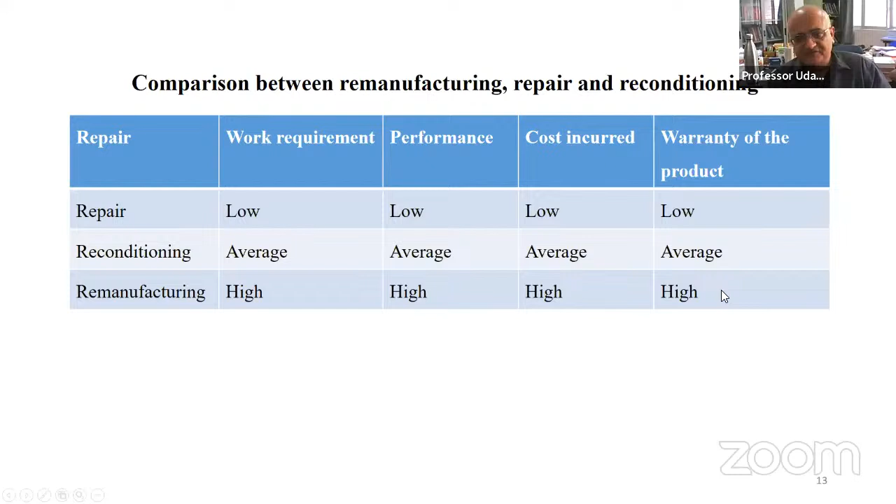Now, cost incurred: cost in repair is of course low, reconditioning is average, but remanufacturing will be high in comparison to repair. But this high cost is worth it, because you are basically purchasing a new product. Warranty of the product in repair is low, reconditioning is average, but in remanufacturing it will be very high. So remanufacturing saves energy as well as money.

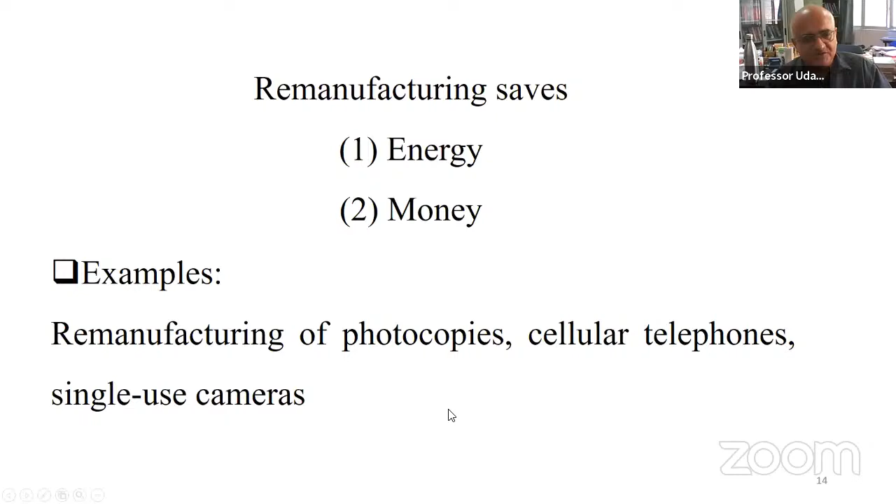Some examples of remanufacturing activities that have already taken place include remanufacturing of photocopiers, Xerox machines, cellular telephones, and single-use cameras.

The cost component actually consists of material cost, labor cost, and overhead. Now, if we compare manufacturing and remanufacturing, the cost component is like this: material cost in manufacturing is very high, but in remanufacturing it is low. So remanufacturing shows a lot of savings in material cost.

Labor cost in manufacturing is low, but labor cost in remanufacturing may be high, because in manufacturing you have a product line, suppose automobile, everything is going on with brand new products getting assembled automatically. But in remanufacturing, you have to carefully see which parts can be used and which cannot. This may not be possible with robots alone; human intervention is needed to decide which part to throw and recycle, and which can be used again. So labor involvement is more in remanufacturing, but material cost is actually low, and overhead cost is also low, while in manufacturing the overhead cost is high. So remanufacturing is a very labor-oriented work.

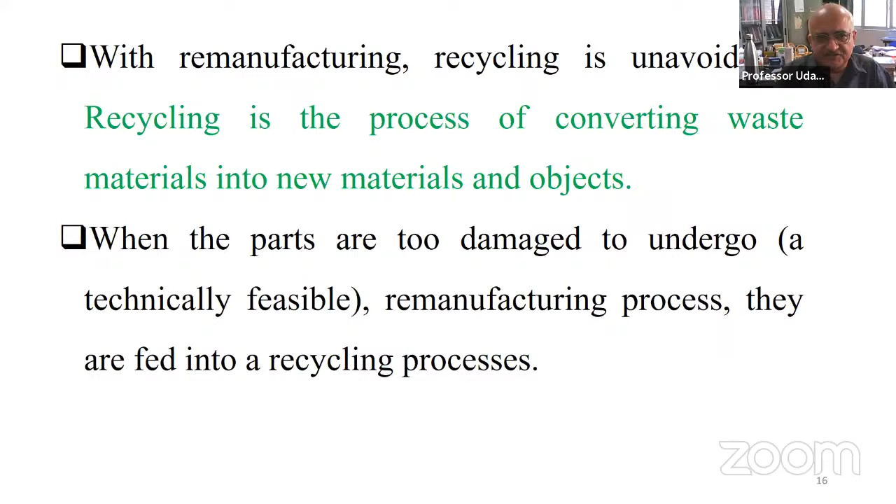Now with remanufacturing, recycling is unavoidable. As I already said, you can do remanufacturing, but some components have to be recycled and used again. Recycling is the process of converting waste material into new materials and objects. In machine tool industry, you get chips, and those chips can again be put into the furnace to make a new product. That is one form of recycling. When parts are too damaged to undergo remanufacturing, they are fed into a recycling process. So side by side, a recycling industry should also be there; there should be provision for that.

Now, what are the basic problems in remanufacturing? What challenges do we have to face? One is material flow. We should get sufficient parts, because these issues become very important.

Recently I organized an industry academia interaction at IIT Guwahati. Some people from industry were discussing that in cement manufacturing, there is a regulation that some amount of fly ash, which comes from power plants, should also be added in the cement. But in Assam, they are getting problems in getting sufficient fly ash, so although it is just waste, they are not getting it. Similarly, if I set up an industry based on remanufacturing using old car components, but if those components are not available to me, there will be difficulty, and you cannot artificially create those components.

So many people think that with remanufacturing, the fate of manufacturing will go down and new things will not be manufactured. No, new things have to be manufactured, because unless new products exist, how can you get remanufactured ones?

This question also comes: how many cycles of remanufacturing can be done? Suppose I make one automobile and it is remanufactured, then it finishes life again, can it be remanufactured a third time, fourth time, like that? But naturally there has to be production, new components have to be made, so only then can you get the material.

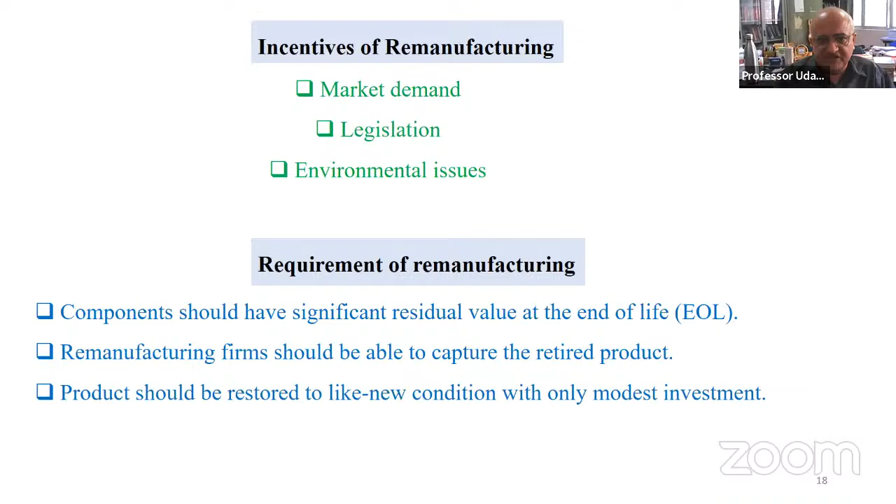The remanufacturing firm should be able to capture the retired product - that is very important. So when they sell a car or any product, there should be an agreement that they take back the product after some time. The product should be restored to like-new condition with only modest investment, not huge investment. So design should be done in such a way that this can be achieved with modest investment - for example, instead of welding, going for riveting or fastening type of joints, so that parts become easily reusable.

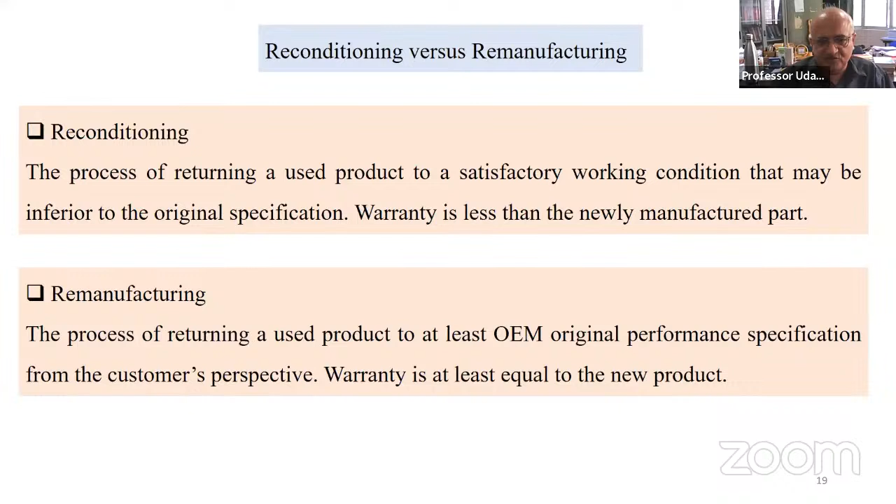Reconditioning versus remanufacturing: reconditioning is the process of returning a used product to a satisfactory working condition that may be inferior to the original specification, with warranty less than the newly manufactured part. But remanufacturing is the process of returning a used product to at least OEM original performance specification, and from the customer's perspective, the warranty is at least equal to the new product.

So what are the barriers to remanufacturing? Technology advancement means components become obsolete - that's one thing, technology keeps advancing. How do you handle this? For example, CD drives - earlier we used to have floppy disks, all these things have gone. So naturally they cannot be remanufactured.

Then there's lack of effective remanufacturing tools - this problem has to be overcome. Then poor customer perception - we are now creating awareness through workshops and conferences to build good perception among customers' minds, and industry will also create good customer perception through advertising. Then low demand, high selling price, high lead time, and banned products. Some products are banned and cannot be remanufactured, like refrigerators, because of the refrigerants - the technology has to be changed.

Then there are IPR issues - although many MSMEs can come into the business, there can be patent issues. You cannot just decide to remanufacture a car or something. Then design issues are also there - parts get damaged during removal and cleaning process. If the designer has not made it so parts can be easily disassembled, it becomes very difficult. Many times designers use plastic items that are totally sealed - if you take it out, it gets totally damaged.

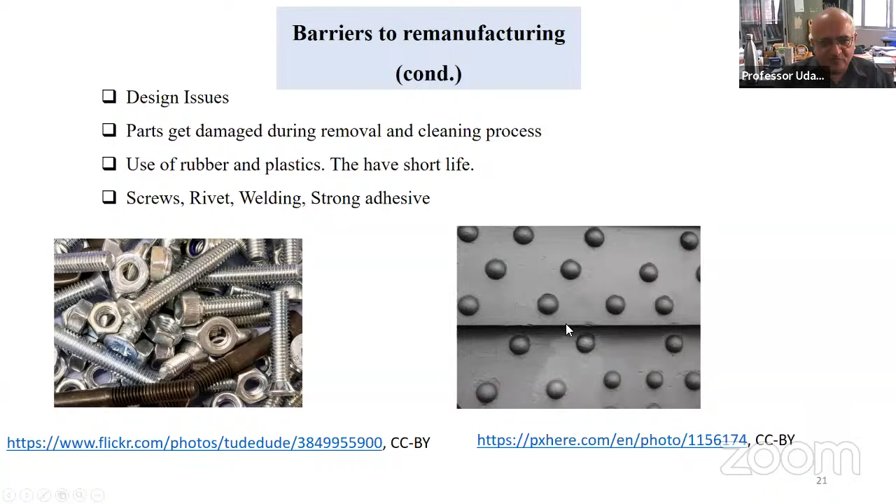And then screws, rivets, welding, strong adhesives - we have to decide on these. Screws are very easy to disassemble. Riveting also can be done in some way, but sometimes welding makes it a permanent joint, so we have to think about that.

So what is the present status of remanufacturing? Majority of products that are currently remanufactured have not been designed for remanufacturing and business. As of now, they have not given much thought, but there is growing interest in product recovery, recycling, remanufacturing, reuse, repair, and refurbishment.

Refurbishment is the act or process of cleaning, decorating, and providing it with new equipment or facilities. So these are the steps involved in remanufacturing: core acquisition, where core components are required and sent to necessary facilities for processing.

Then disassembly - at the remanufacturing facility, the failed components are completely dismantled. Condition assessment - every dismantled part is inspected and sorted according to whether those parts are usable, unusable, or need repairing.

Then cleaning - usable and repairable parts undergo a cleaning process, and unusable parts are sent into recycling or waste disposal. Repairs and necessary improvements to the parts are made using advanced manufacturing processes, relying on the expertise of the staff. Professor Rahman was just now telling about that.

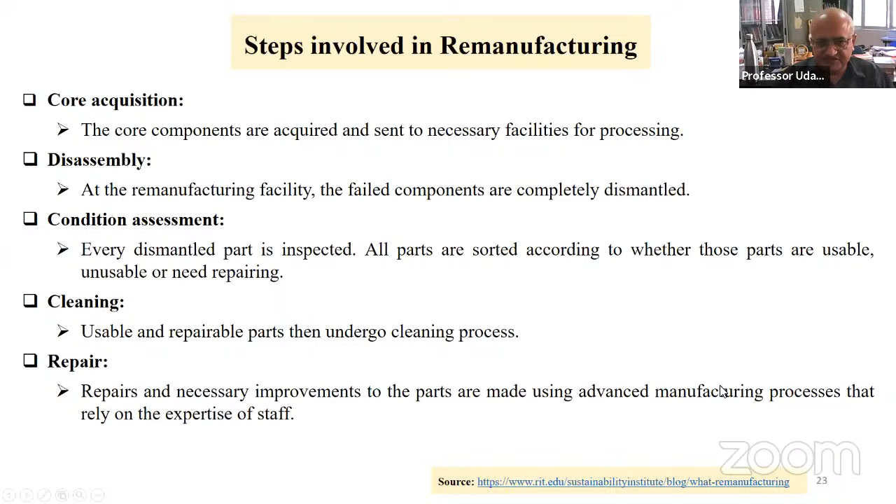Repair can be done using advanced manufacturing processes like machining, etc. Then assembly - all the parts are reassembled and a new product is built, with any required new parts also incorporated. Then testing - the performance of the remanufactured product is tested and evaluated against the specifications.

Then service life - the final remanufactured product is commercialized and begins its new service life. Then core return - after reaching the end of its useful life, the product is sent back into the remanufacturing process to evaluate if it can be remanufactured again. So this process continues and becomes a completely circular economy.

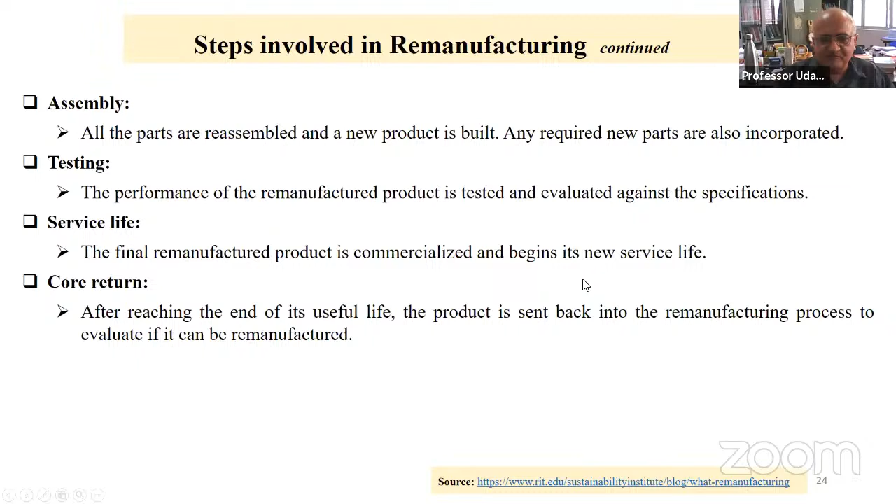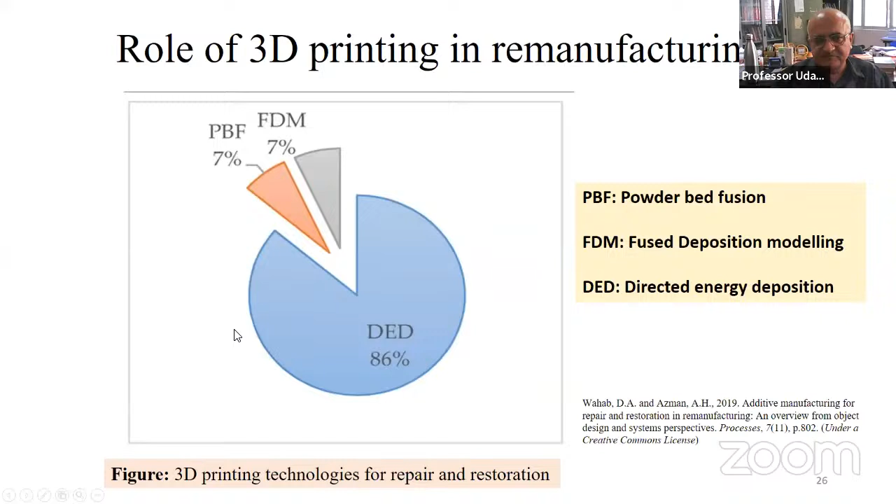And 3D printing technologies for repair and restoration: powder bed fusion 7%, fused deposition modeling process 7%, but directed energy deposition has a big role, that is 86%. That is basically metallic 3D printing, etc., so it has got a big role in that.

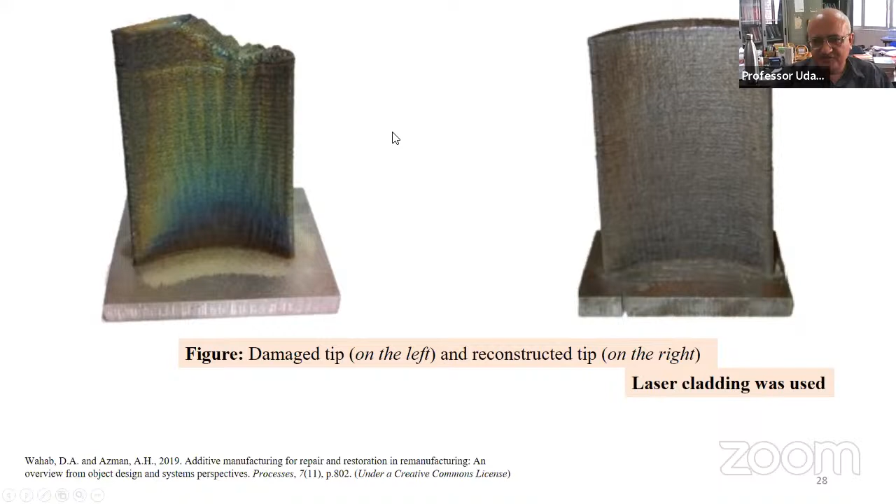And so this is the damaged tip, and I think a similar type of item was shown by Professor Rahman also, and then after that laser cladding was done. So with the help of laser cladding or 3D printing, you can actually make a new type of tip.

Okay, so challenges and barriers: only 9% of the 92.8 billion tons of minerals, fossil fuels, metals, and biomass that enter the economy are re-used annually. This is from the circularity gap report of 2019.

And there are not enough remanufacturing awareness programs at academic level, because remanufacturing as a subject is also not there. In fact, we can slowly add remanufacturing, if not as a subject, but at least as a chapter - maybe in 2-3 lectures, we can cover remanufacturing also in manufacturing courses.

Remanufacturing equipment is not readily available, that is also one thing. There are not enough regional innovation research and development projects. DST etc. should also give some funding in this line so that projects of remanufacturing can be taken up by researchers.

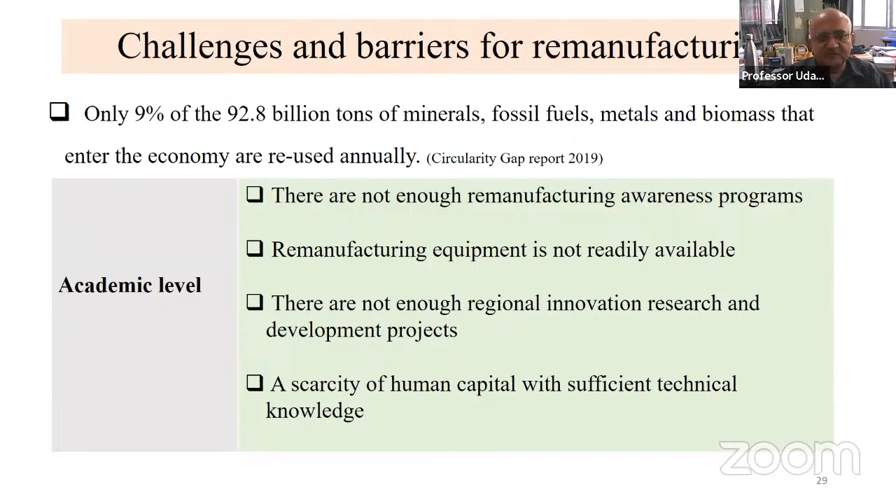A scarcity of human capital with sufficient technical knowledge - that is one thing. But although we have expertise, the same type of things will be used - non-destructive testing, and even the skill of repair will all be used. But right now there are some problems.

These are the problems of not only our country. I am talking in general, because I have seen many sources while preparing this lecture. So in other countries also, these are the same problems, that taxes should be reduced. That is the demand of manufacturers in all countries, not only our country. So our country also should do this type of thing.

Industry level, what are the problems? Remanufactured goods have low demand, and there's a lack of desire to return used goods. It is difficult to set up a system for returning used goods. Balancing supply and demand is a difficult task. Struggling to stay competitive with brand new products. Long-term investment is needed to start a remanufacturing company, but investment in the remanufacturing industry is not financially viable. The manufacturing industry suffers from lack of investment, uncertainty of quality of returned used items, and complications due to a large number of product models and variations.

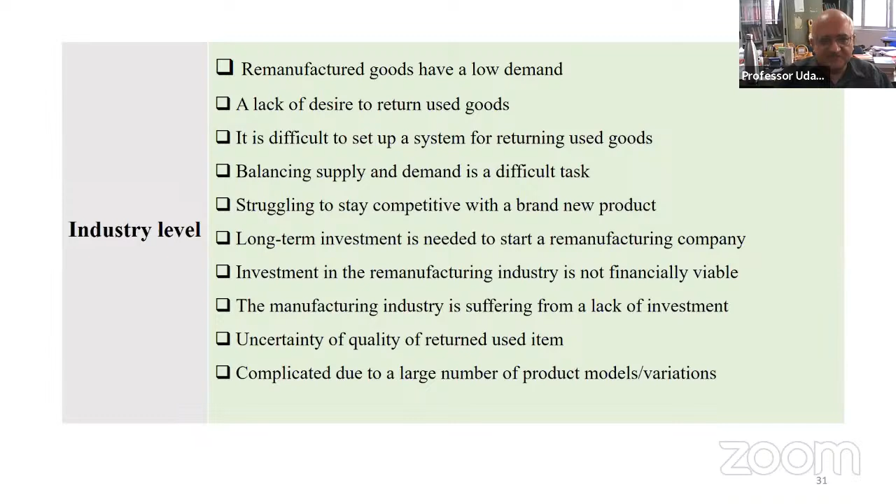So there are a lot of challenges. This means industry needs a lot of support from policy makers and academicians. This is mostly an overview, some thoughts on how we academicians have to think about remanufacturing and how we can help in this area. These are some references related to remanufacturing from which we could get more information, and this is all.